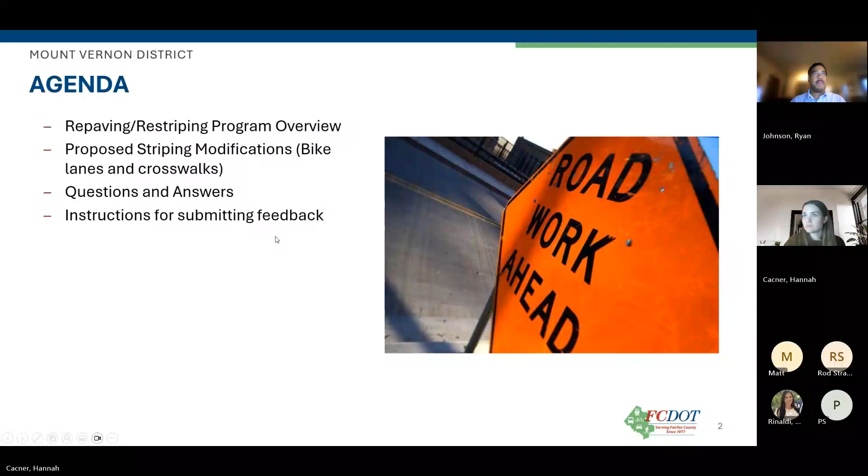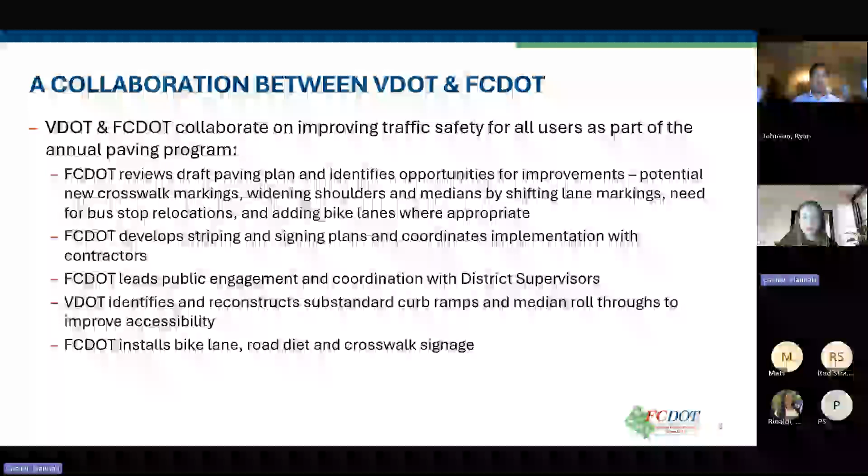I'll start with a quick overview of the program. Each year, VDOT and FCDOT collaborate on providing safety improvements for all roadway users as part of VDOT's annual paving program. That process typically begins with FCDOT reviewing VDOT's draft paving list in the spring or summer, then identifying opportunities for improvements, which can include new crosswalk markings, bike lanes, and road diets. We'll sometimes propose other striping improvements, but those three are the most common. From there, our agency develops striping and signage plans for implementation right after the road is repaved, and we also lead public engagement efforts. Once striping is complete, we install any associated signage with the new bike lanes and crosswalks.

As I mentioned, there have been some recent changes to this program. Typically, public meetings for our proposed bike lanes and crosswalks are held jointly with VDOT in the spring, after VDOT has published their annual repaving list. But after some discussion with VDOT this past year, we decided it would be better to hold public meetings several months in advance of the 2026 repaving season, just to provide more time to get the striping plans created and to get project approvals through.

So the proposed bike lanes and crosswalks are all on roadways currently on VDOT's draft repaving list—definitely emphasis on draft there. The final list won't be published until spring of 2026, so it's very possible some of these roadways will not end up on that final list. Typically, roadways that don't end up on VDOT's final paving list are just deferred for a year or two, so any approved new bike lanes and crosswalks would be deferred as well and ultimately added when the roadway is repaved, whenever that may be.

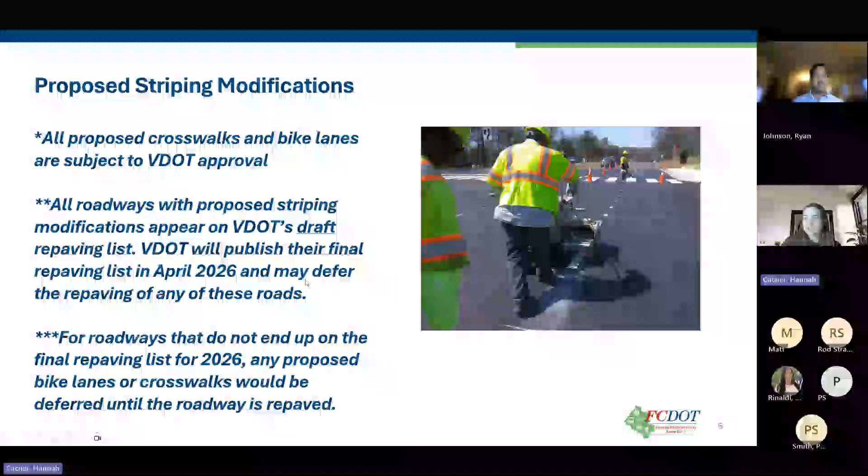Just a reminder that each of these projects is still fairly preliminary, and each one will be subject to approval by VDOT, and then also whether or not each roadway ends up on the final paving list, which will be published in the spring, usually in April.

Each year FCDOT and VDOT add a number of new bike lanes through the repaving and restriping program, largely to repurpose underutilized roadway space. Many roads in Fairfax County were built with wider than necessary travel lanes, or sometimes too many travel lanes than are needed based on volumes, which can lead to safety issues like speeding or inattentive driving. Repaving gives us the opportunity to right-size roadways by narrowing travel lanes or converting additional travel lanes into bike lanes or center turn lanes at very little cost.

This also helps us implement our planned bicycle network at relatively low cost, because it's much less expensive to add new pavement markings when the roadway is already being repaved.

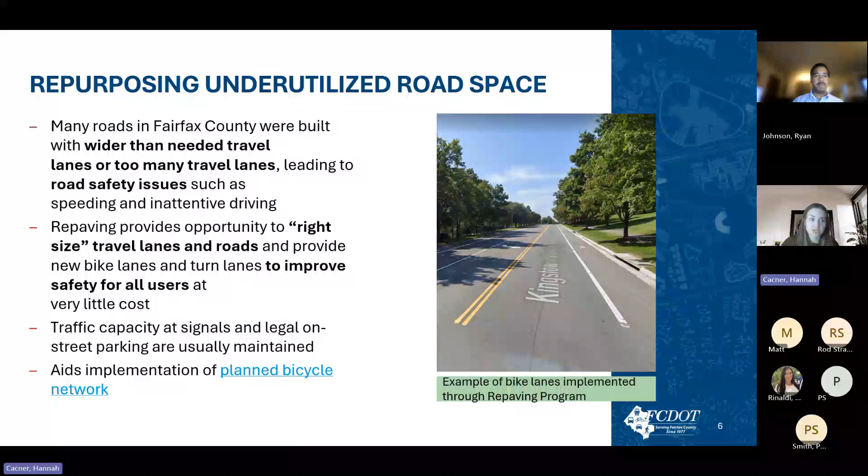Here's an example of bike lanes that were added a couple of years ago through the repaving program on Annandale Road. As you can see, you get a really nice traffic calming effect because the roadway is visually narrowed, so people feel like they have to slow down.

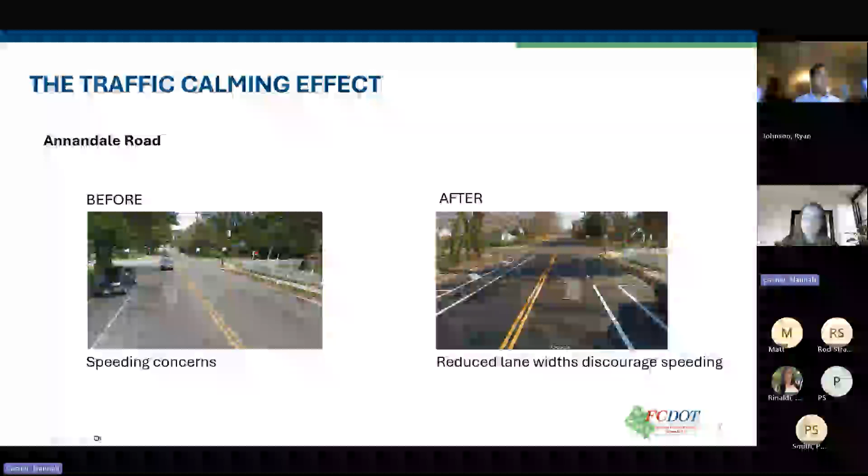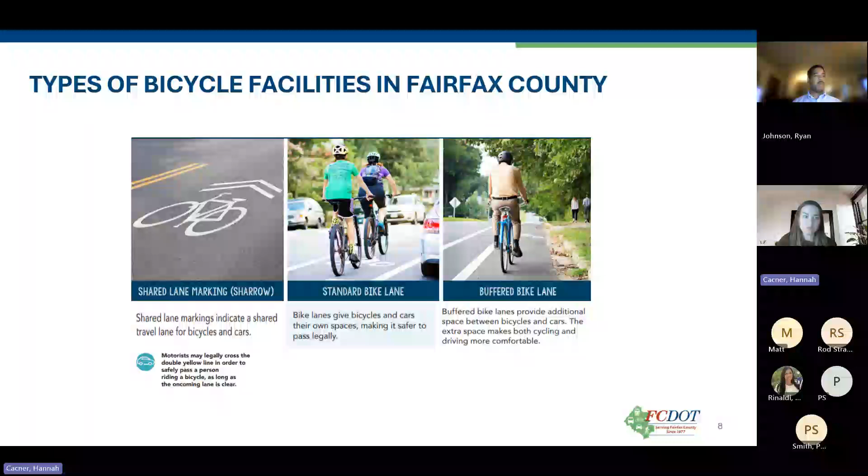These are the type of bike lanes we typically add through the repaving program. We don't usually add sharrows anymore, and we try to add buffered bike lanes wherever possible to give additional separation between cyclists and vehicles for a more comfortable experience. Although this program only allows us to stripe bike lanes, adding the buffer gives us the option to add protection in the future by adding physical barriers, but those usually have to come through other funding sources.

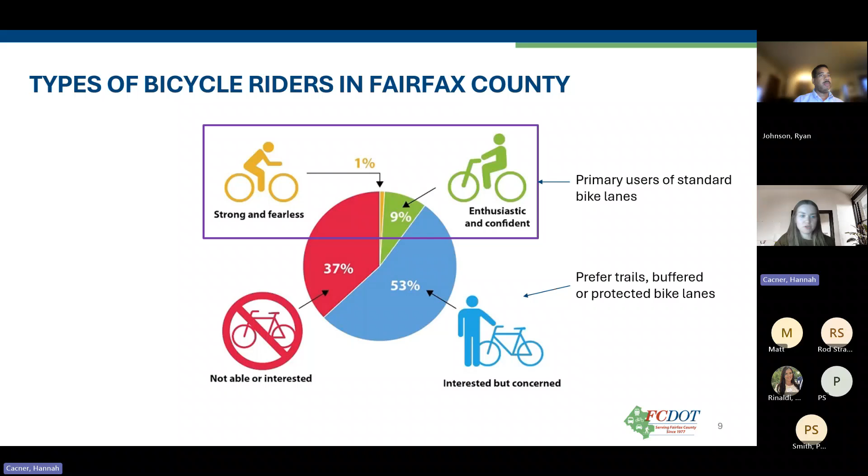I won't spend too much time on this since we have a lot of proposals tonight, but these are just a few benefits of adding bicycle infrastructure. As you can see, bike lanes really provide benefits to all roadway users, not just cyclists.

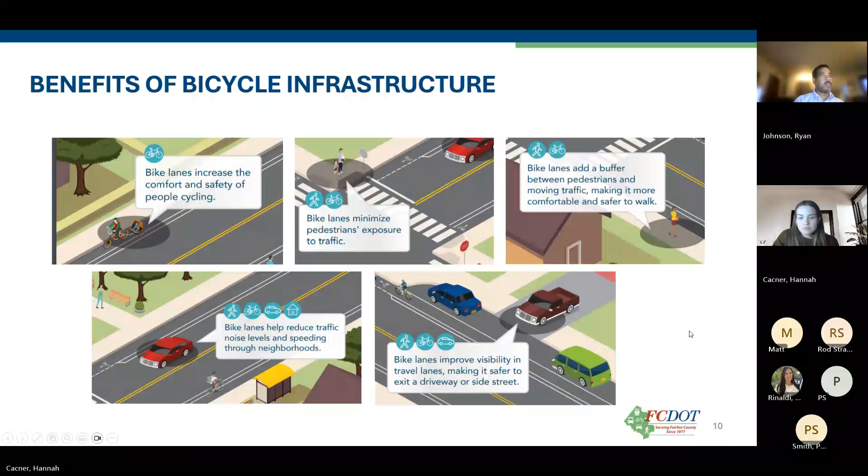Moving on to the first of our proposed striping projects, we're proposing to extend the eastbound bike lane on Beacon Hill Road by about 1,000 feet to this segment in green right here.

Can you see my mouse, Ryan? Just want to make sure. If not, I'll turn on the laser pointer. Yes, we can see it. Okay, great.

We have some existing bike lanes on Beacon Hill already, marked in white. We would be making those existing bike lanes more continuous by removing some of the street parking here and adding that one eastbound segment. One big reason we'd like to make this segment more continuous is because right up here is Richmond Highway, and there are planned bike lanes as part of the Richmond Highway BRT project that would be great to provide a connection to.

In order to make space to extend this bike lane, we would need to remove about 30 parking spaces. But as with all proposed projects that would require removal of parking, we have a survey you can take to weigh in on whether or not you would be in favor of removing the street parking along this segment.

The survey options for Beacon Hill are either to make no changes to the roadway, or to remove the parking bay and extend that bike lane by about 1,000 feet. That survey will help inform Supervisor Storck on whether or not to move forward with our proposed projects, and I'll have a link to that at the end of the slideshow.

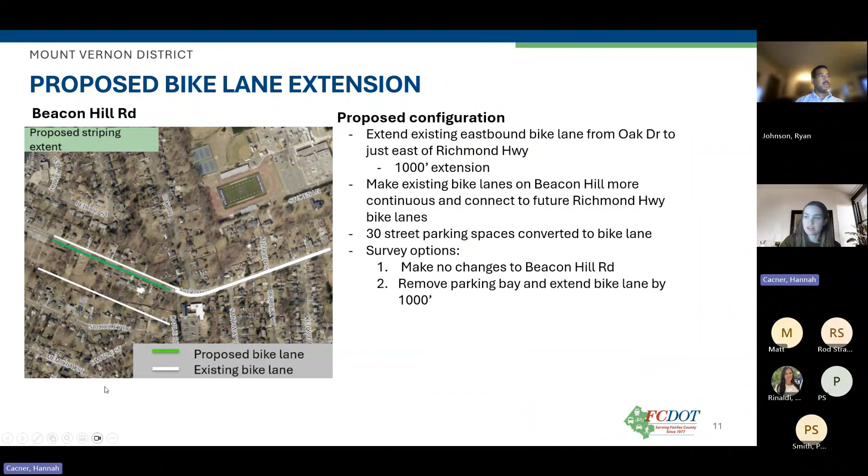This is just what Beacon Hill looks like currently. We have a bike lane on this side, and we're proposing to remove that parking bay and add a bike lane on this segment here.

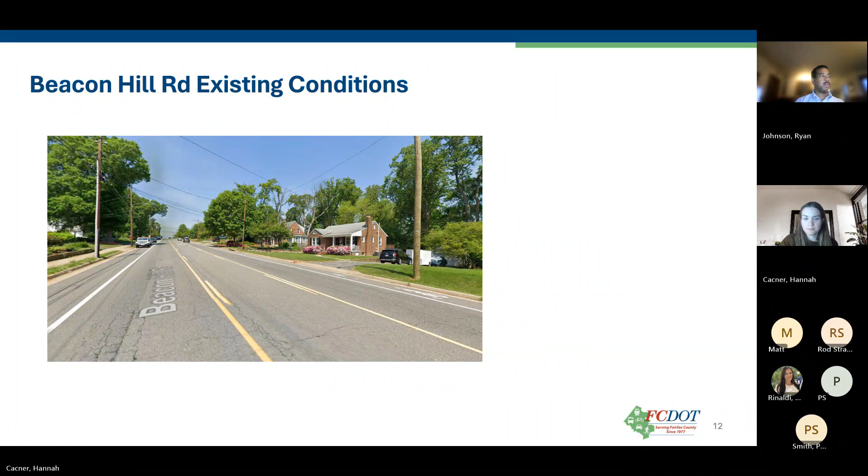We did have a consultant perform a parking study on 3 of these roadway segments to help give us additional insight into parking utilization along each one. Our consultant performed these studies over the course of a week, last week actually, counting the number of vehicles parked on each roadway segment 1 to 2 times per day at various set times. The full parking study is on our website and linked in the survey, and we'll have those links for you at the end of the presentation.

This corridor had the lowest average parking utilization of all the roadways analyzed, at 18% on average. But again, I'll emphasize that the parking studies are just one piece of information considered when determining whether or not to remove parking and add bike lanes. We'll really be relying on public feedback for these as well.

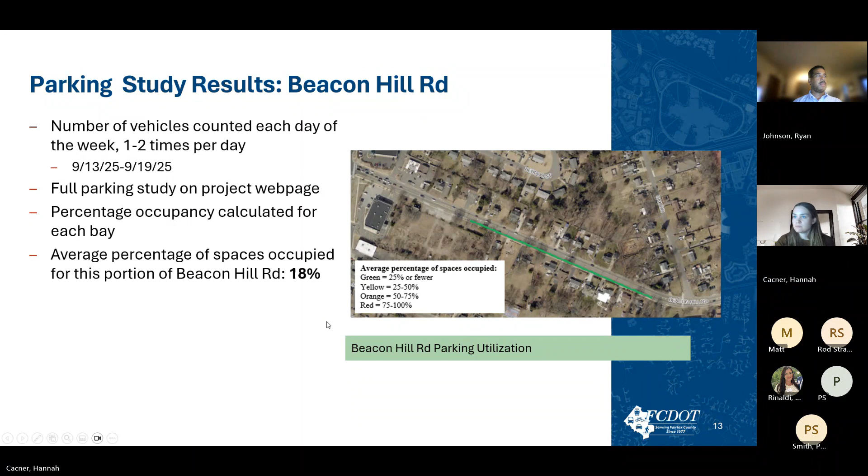We're also proposing to extend the northbound bike lane along Quander Avenue by about a tenth of a mile by removing parking. That's this segment here in green, which would require removal of 11 parking spaces. Another part of this proposal would be removing a small section of parking next to this Ourisman dealership—only about 8 spaces—and adding a buffer to the existing bike lane there.

In the survey, you'll have the choice between either making no changes to the road, removing both parking bays to add the buffer and extend the existing bike lane, or just removing one of the parking bays to extend the bike lane while preserving the other parking bay.

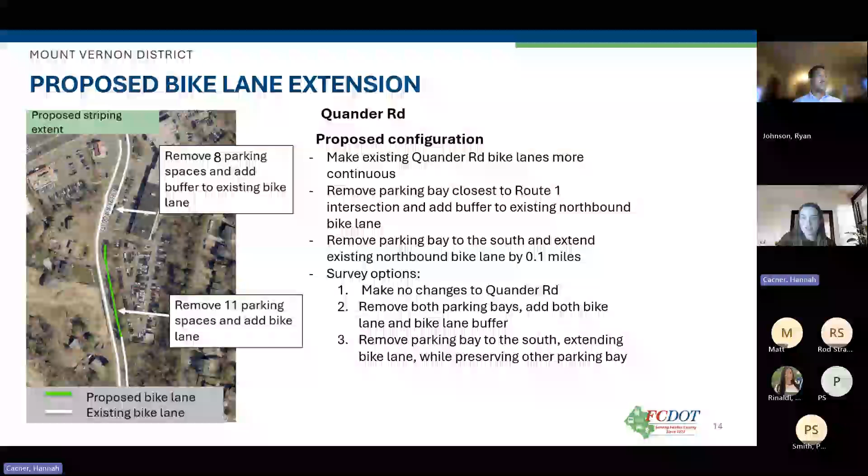So this first segment here, we'd be proposing to remove this section of street parking, shifting the bike lane closer to the curb, and then adding a buffer so it looks like the bike lane on the other side of the roadway. The other portion of Quander is where the existing bike lane is, so we'd just be proposing to extend it a bit further where those cars are parked.

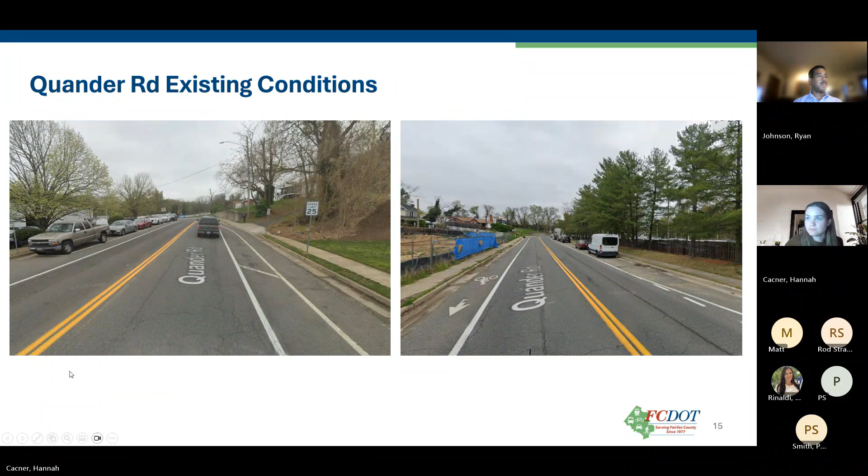Our parking study did show a fairly high utilization rate for both of these parking bays, especially the one to the south. So this is definitely something that will be considered before moving forward, and again I encourage everyone to weigh in through our survey.

We're also proposing to extend the existing bike lanes on Belle View Boulevard down to Boulevard View to get a little bit closer to the GW Parkway in anticipation of that planned connection to the Mount Vernon Trail. Doing so would require the removal of about 40 spaces on either side of Belle View Boulevard.

But in the survey, we also list the option to just add the bike lanes to one side of the roadway to preserve some of the street parking. And of course, the survey also lists the option to just make no changes to the roadway and leave it as is.

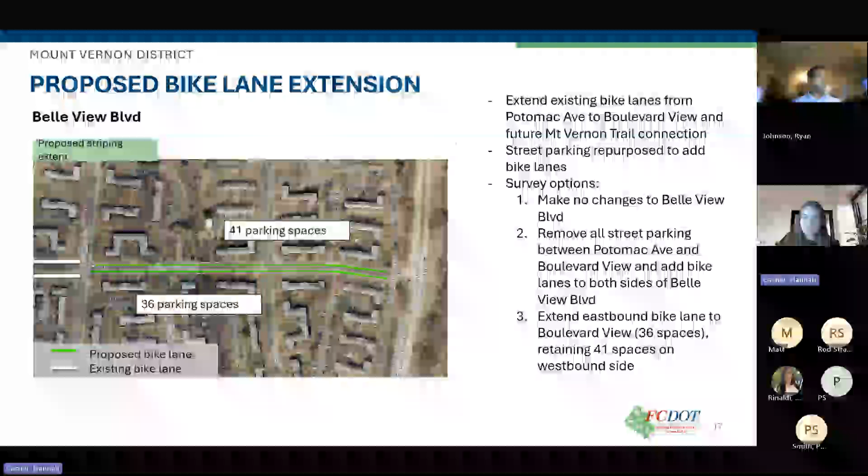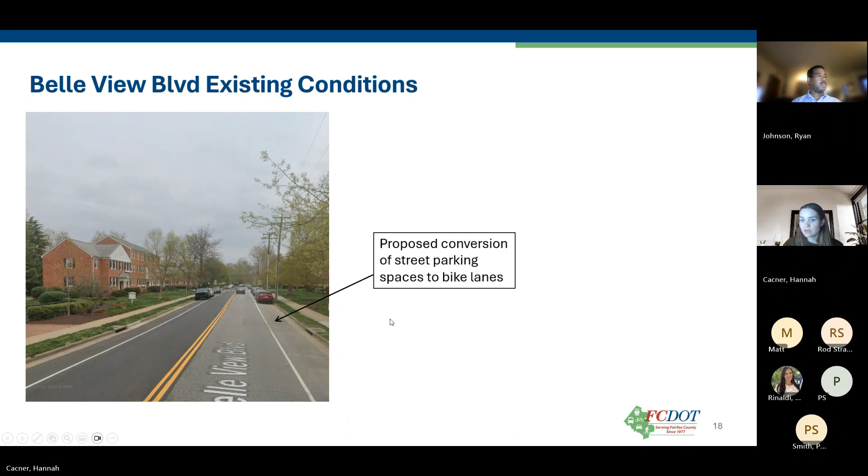These parking bays here are what would be converted to bike lanes, extending the bike lanes further to the east on Belle View Boulevard. The parking utilization rate for the portions of Belle View Boulevard analyzed ranged from about 40% to 65% on average. Again, we have the full parking study on our webpage, so be sure to take a look if you're interested in more detail.

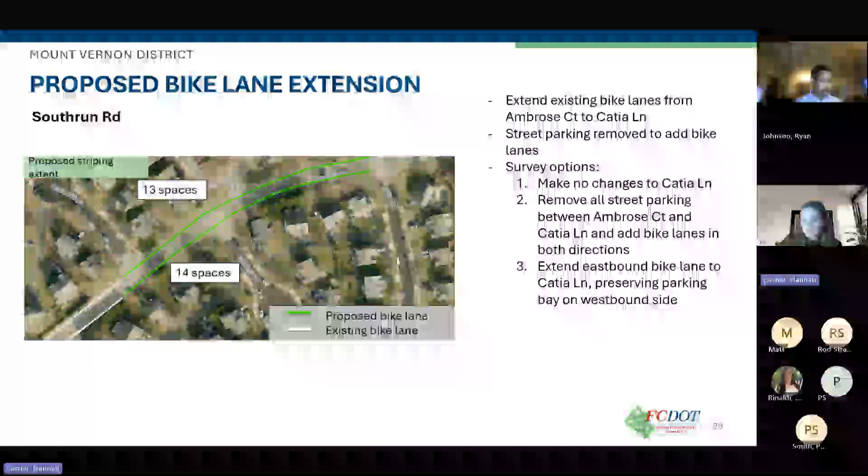We're also proposing extending the existing bike lanes on Southrun Road to Catia Lane, which would be added through the removal of street parking. The survey options for this roadway are listed on the slide. This is what that segment looks like currently, and those are the existing bike lanes that we would be extending.

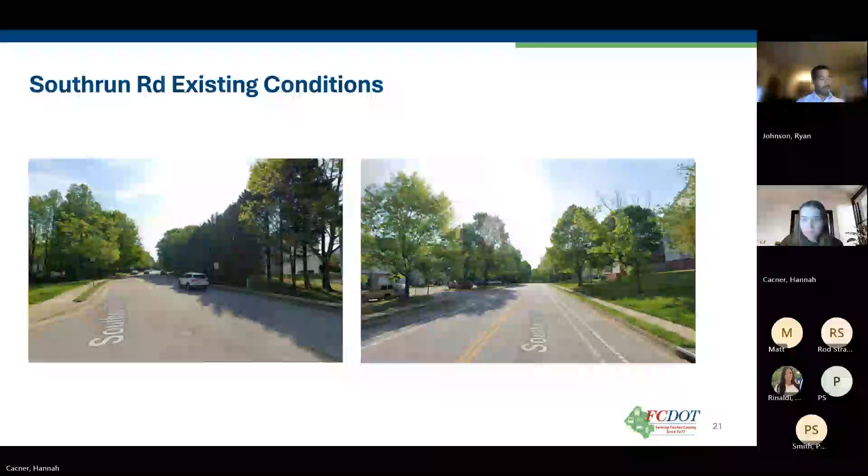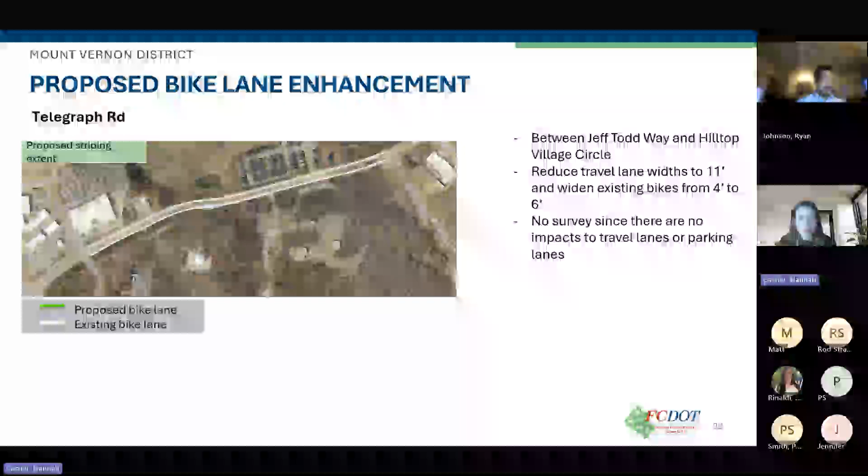We are also proposing to widen the existing bike lanes on a portion of Telegraph Road between Jeff Todd Way and Hilltop Village Circle. The current bike lanes were built to a previous design standard, so they were only about 4 feet wide. We're proposing to widen them to 6 feet to better align with current guidance on bike lane design, by narrowing the travel lanes to 11 feet, which is pretty standard. Right now they're a bit wide for a road with those volumes.

We do not have a survey question for this project just because there should not really be any noticeable impact to drivers by narrowing the lanes by a foot, or by 2 feet, sorry.

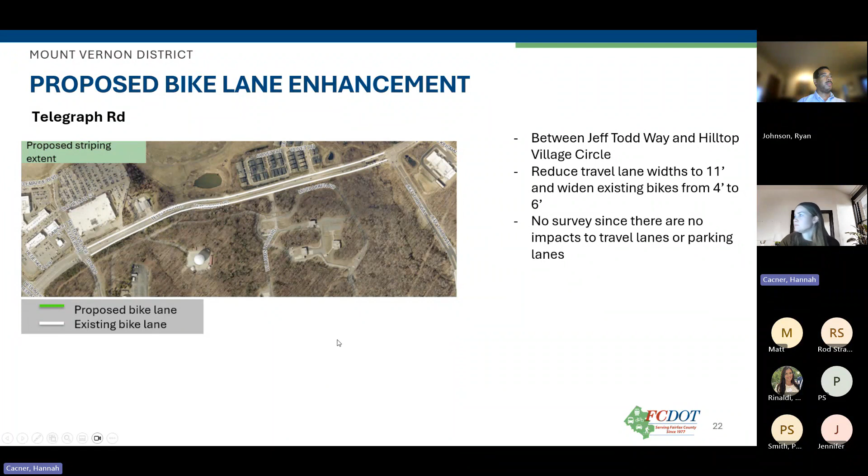We're also able to add new crosswalks through this program, and this year we're proposing to add 5 crosswalks in Mount Vernon District. In order for VDOT to consider adding the crosswalk when they repave, the curb ramps on both approaches to the crosswalk have to meet the current ADA standard. So that sometimes limits us in how many crosswalks we're able to add. We also sometimes need to restrict parking on the approach to the crosswalk, just to ensure that parked vehicles don't block the view of people crossing the street.

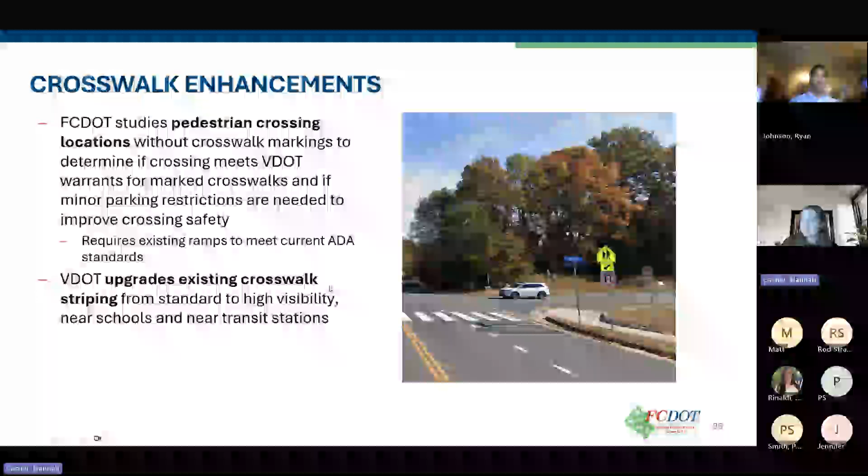Our first proposed crosswalk is crossing Beacon Hill Road at Derrell Court, connecting 2 bus stops on either side of the road. There's no street parking on this portion of Beacon Hill, so we would not need to restrict any parking.

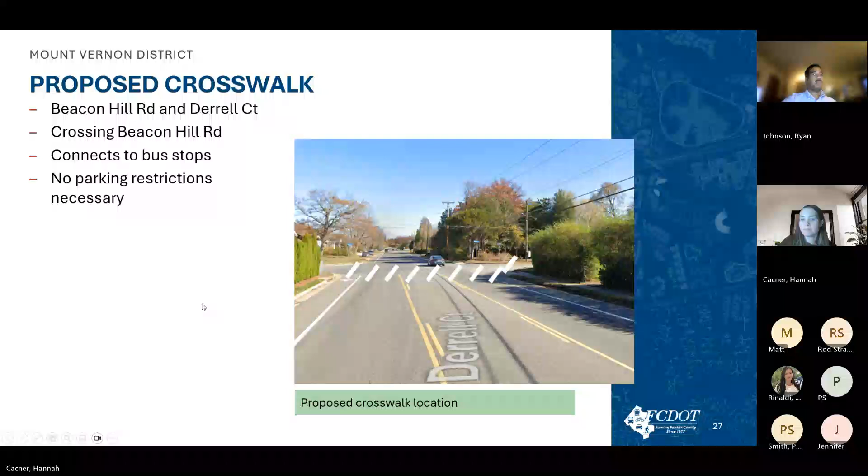Next we have a proposed crosswalk at Beacon Hill Road and Blue Wing Drive, again crossing Beacon Hill Road. This would provide a marked crosswalk connecting to the Mount Vernon Rec Center, and again, no necessary parking restrictions here either.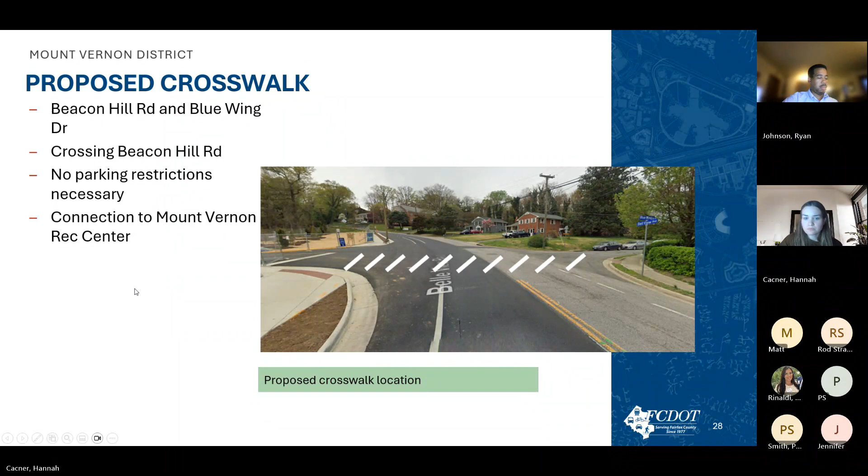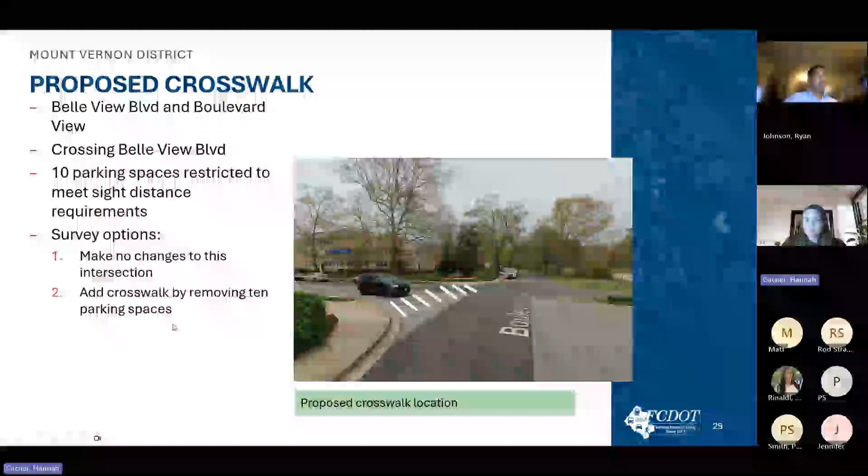We are also proposing a crosswalk crossing Belle View Boulevard and Boulevard View, which would require us to restrict 10 parking spaces in order to meet those sight distance requirements. But we do have a question in the survey that will allow you to weigh in on whether or not you are comfortable with removing those parking spaces. Of course, if the public was in favor of adding the bike lanes on Belle View Boulevard, those parking spaces would already be restricted. But in case the community is not in favor of adding bike lanes, another option would just be to add the crosswalk - but we still would need to restrict some street parking in order to do that, just based on the state code.

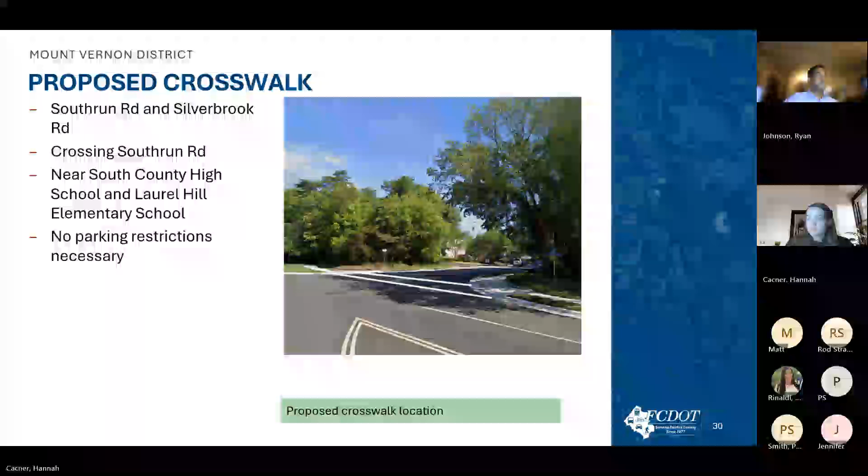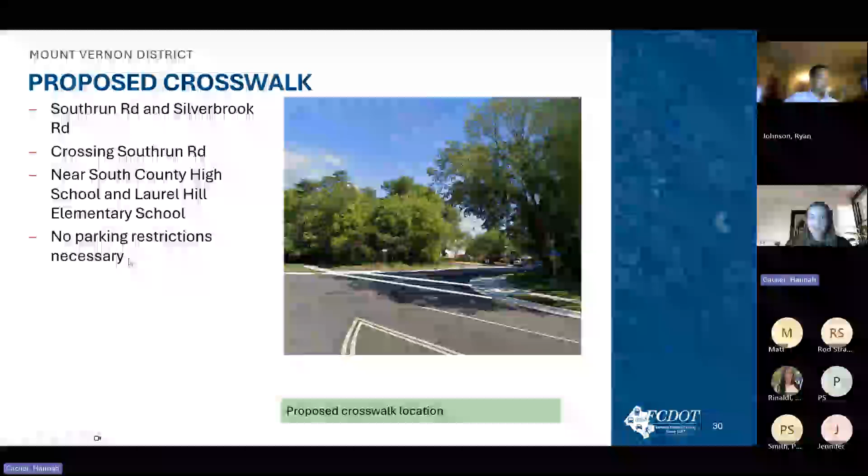Another proposed crosswalk we have is at Southrun Road and Silverbrook Road, crossing Southrun Road. This one's near South County High School and Laurel Hill Elementary School. This one would not require any parking restrictions because there's a stop sign there.

And our final proposed crosswalk is crossing Potomac Avenue at Belle View Boulevard, and no parking restrictions needed for this one either.

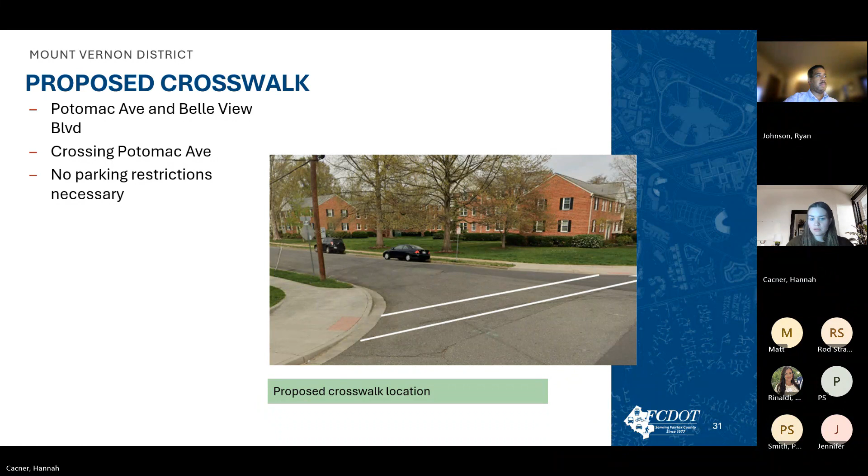That just about wraps up my presentation for the evening. But before we move on to the question and answer portion of the meeting, I did just want to make a couple of notes on community feedback, how to submit that, and any other questions you may have.

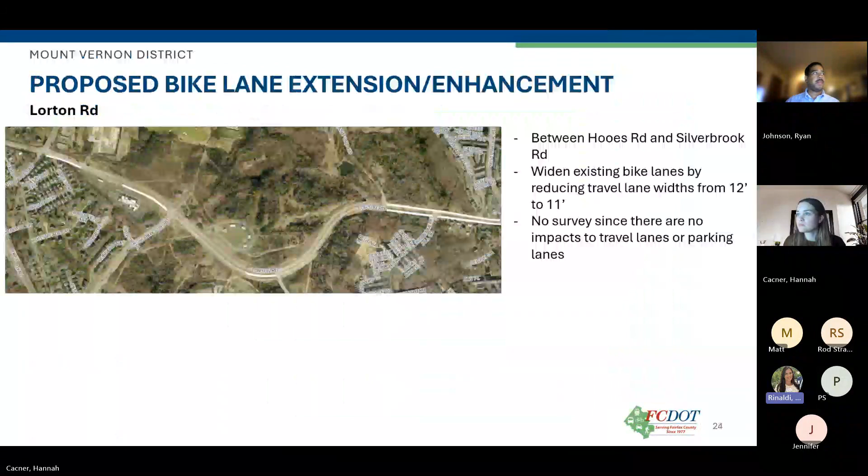Sorry, I was muted. Could we go back for a second to Quander Road? I know that particular area had a higher amount of parking, I think, based on the consultant going out there and taking the survey. I wanted to point out, what I've heard is that there's a lot of commercial parking there, and there's a dealership that also has some of their overflow vehicles parked. Were there any notes from the consultant when they did the survey, or any personal observations from the FCDOT team when they went out there, about what types of vehicles are being parked there?

Right, and we were aware of that. The consultant really just recorded the raw data, how many vehicles were counted in each of these parking bays. But what I noticed when looking at that data was that the percentage of vehicles remained about the same throughout the day, with a couple of exceptions, which is a good indicator that those vehicles are just sitting there. Okay, so that's what we thought. That's good to know. Thank you.